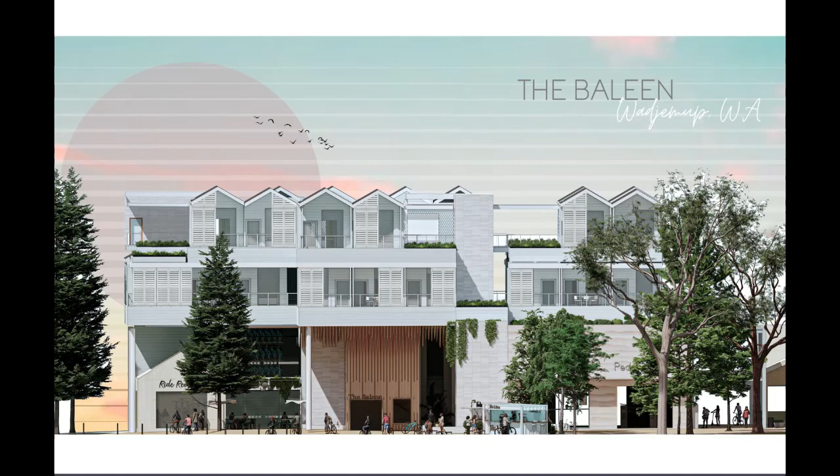Our site is located on Wadjamup Island off the coast of Perth, Western Australia. Wadjamup, also known as Rottnest Island, is a small holiday destination for both locals and tourists alike. Wadjamup is home to the biggest bike hire facility in the Southern Hemisphere, Pedal and Flipper. The Rottnest Island Authority are redeveloping Pedal and Flipper and have requested a bigger premises and further activation on site.

We've been asked to provide the site with holiday apartment accommodation that can be built off-site and barged over. In 10 years' time, the apartments will move closer to the beach, though Pedal and Flipper will remain in the same location.

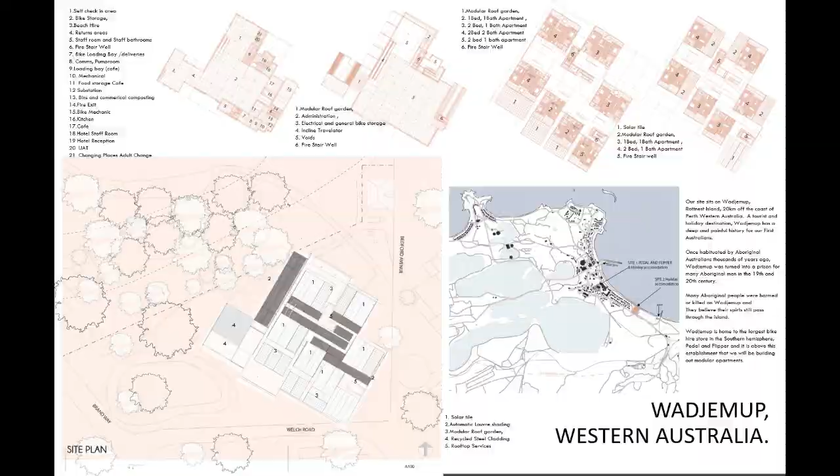The largest growing urban areas in the world aren't being designed by architects. They're being designed by the people and the communities that will reside in them. And they're often built with local materials and very little knowledge about building carbon neutral or sustainable.

If you see the top 10 countries with the highest population growth rate in 2023, they are Syria, South Sudan, Niger, Burundi, Equatorial Guinea, Angola, Benin, Uganda, the Democratic Republic of Congo, and Chad. But 7 of these countries are among the lowest income countries in the world, and they are feeling the worst effects of climate change out of everyone.

So modular housing is probably the best solution to rebuild their communities, or to rebuild all communities globally. However, transport costs, isolation, and dangerous locations make this logistically quite difficult.

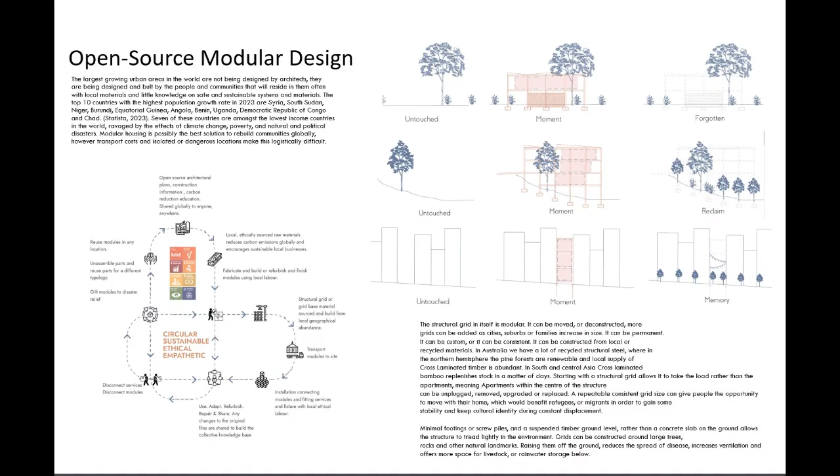The WikiHouse open source concept is a modular building system that is available for anyone in the world to design, download, print, cut, and use, with advice from architects and engineers on how to build their own homes and how to make it sustainable, how to make it long-lasting.

The idea of the WikiHouse stems from Korean architecture, where there was very little hardware needed. So things like nails and screws are kept to a minimum with the WikiHouse. It's a lot of dovetail joints.

The manufacturing of a WikiHouse requires very little space. The footprint is small and therefore doesn't need to be contained to one big warehouse. With WikiSpace, the WikiHouse can happen anywhere, all over the world, in many different places. All you need is some plywood or OSB, a computer, and a CNC machine.

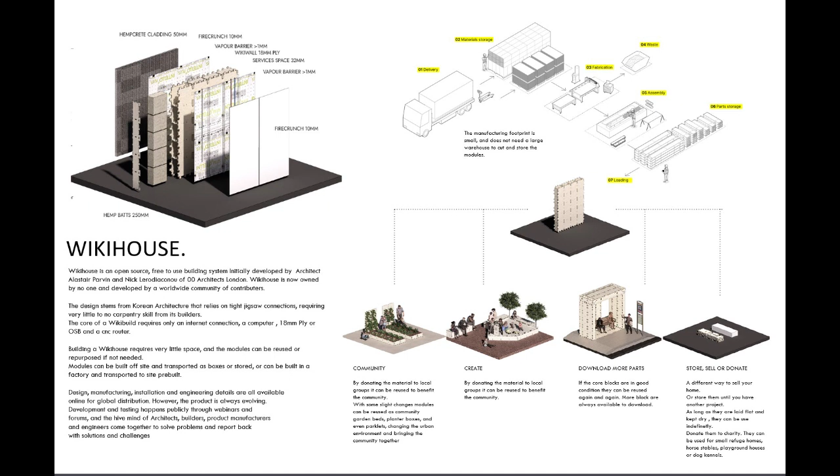Each module is made up of about 217 sheets of ply. They're just under 5 tons, so 4.5 tons per module of plywood, and it's saving about 7,600 kilograms of carbon dioxide, which is about the yearly usage of an average Australian.

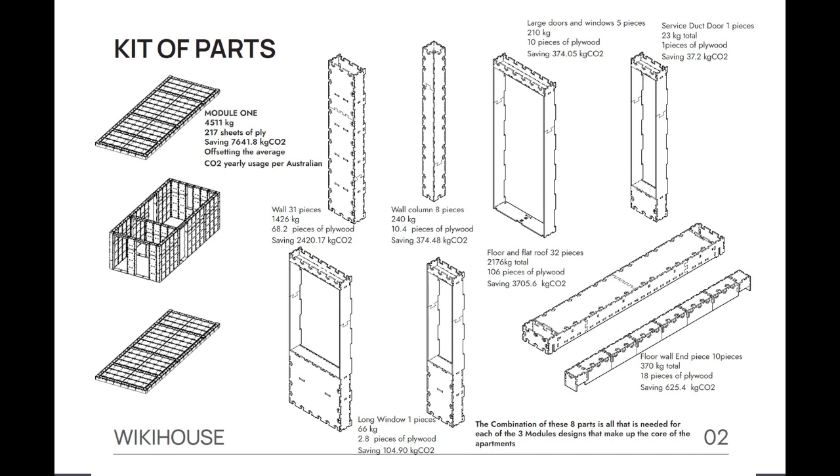The WikiHouse modular apartments at Pedal and Flipper are a combination of only 8 parts, and these 8 sections are repeated, and they just make up the core of the apartment. There are quite a few apartment types that can be made using the 3 modules, Module A, Module B, Module C. They all have joining doors at the same place, so you can switch, you can mirror, and you can create anywhere up to 3 bedroom, 2 bathroom apartments.

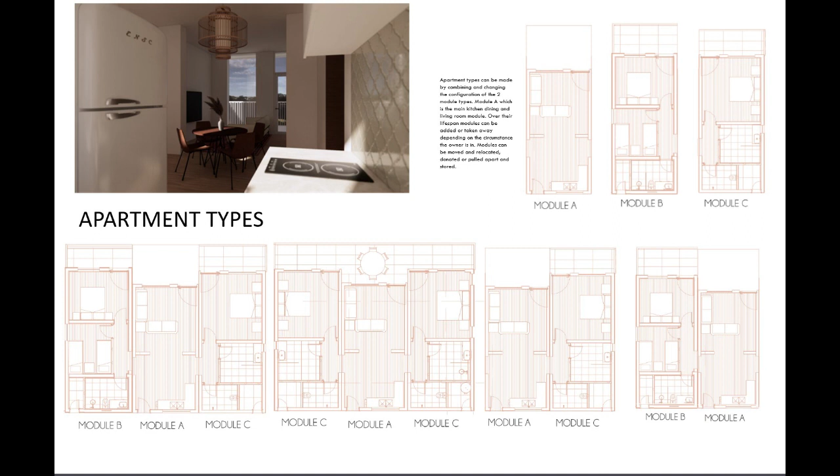Pedal and Flipper and the modular apartments use a lot of new innovative material technology. Services in the building run through a major duct near the elevator shaft. There's a lot of space underneath the apartments where we have the wheel casters and the roof locks, so we take advantage of this space to travel piping and electricity through.

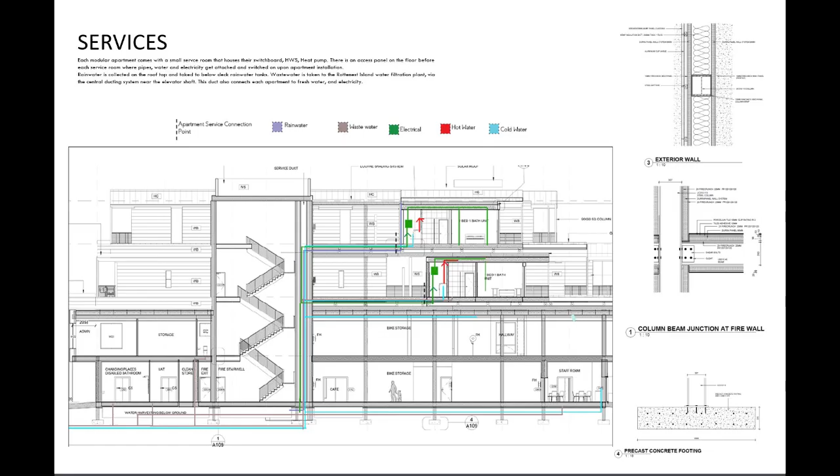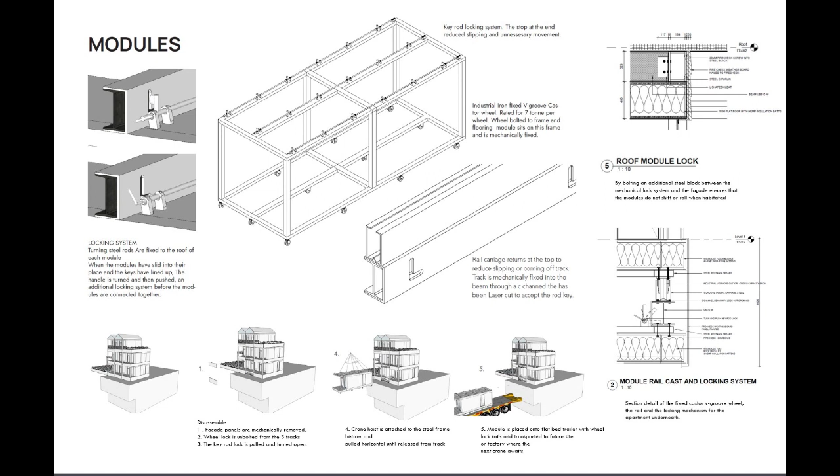Each apartment module has a 3 by 4, so 12 heavy duty fixed industrial caster wheels, which hold about 7 tons each. These wheels allow the apartments to glide into a fixed track that's fitted on the beams. This is a V-groove track with the V-groove wheel. Once they've slid in, they lock in with the base locks with a steel square block, and then the roof locks in with a key rod locking system.